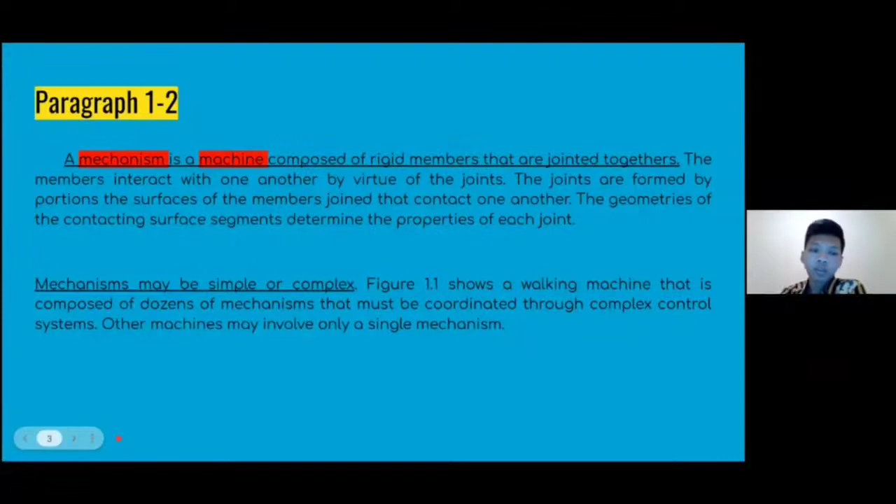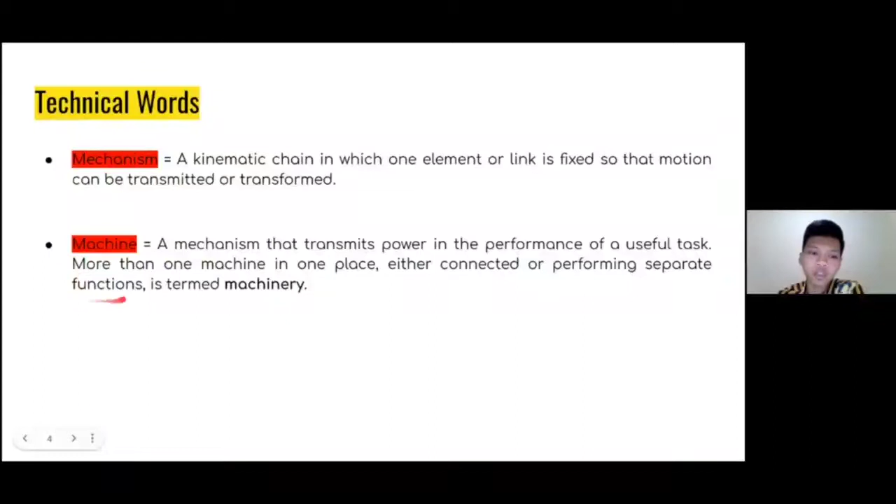Untuk paragraf 1 sampai 2, saya menemukan dua kata teknis yang saya tandai dengan warna merah, mekanisme dan machine. Mekanisme adalah chain in which one element or link is fixed so that motion can be transmitted or transformed. And for machine, a mechanism that transmits power in the performance of a useful task. More than one machine in one place, either connected or performing separate function, is termed machinery.

Selanjutnya untuk paragraf 3, sophisticated as the synonym of advanced, that means canggih. Lalu civil engineering is a professional engineering discipline that deals with the design, construction, and maintenance of the physical and naturally built environment. And the third, military engineering, we can call that combat engineer or ZENI, is defined as the art, science, and practice of design, building military works, and maintaining lines of military transport and military communication.

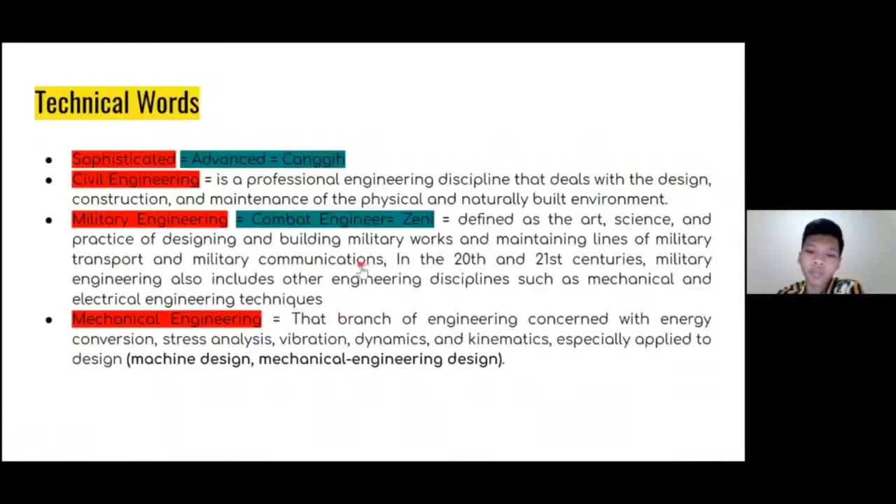In the 20th century, military engineering also include other engineering disciplines such as mechanical and electrical engineering techniques. And last, mechanical engineering is the branch of engineering concerned with energy conversion, stress analysis, vibration, dynamics, and kinematics, especially applied to design, machine design, or mechanical engineering design.

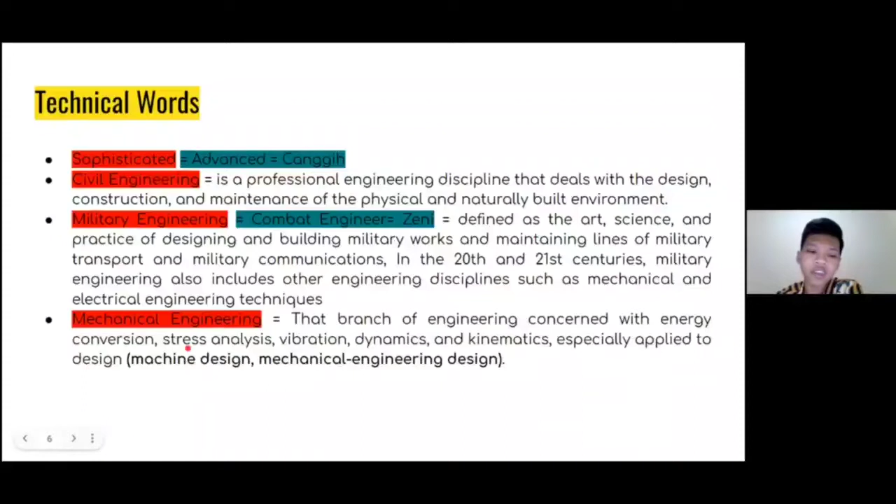And the paragraph 4, I found technical words. Static means lacking in movement, action, or change, especially in undesirable or uninteresting way. The second, actuators is a component of a machine that is responsible for moving and controlling a mechanism or system, for example by opening a valve.

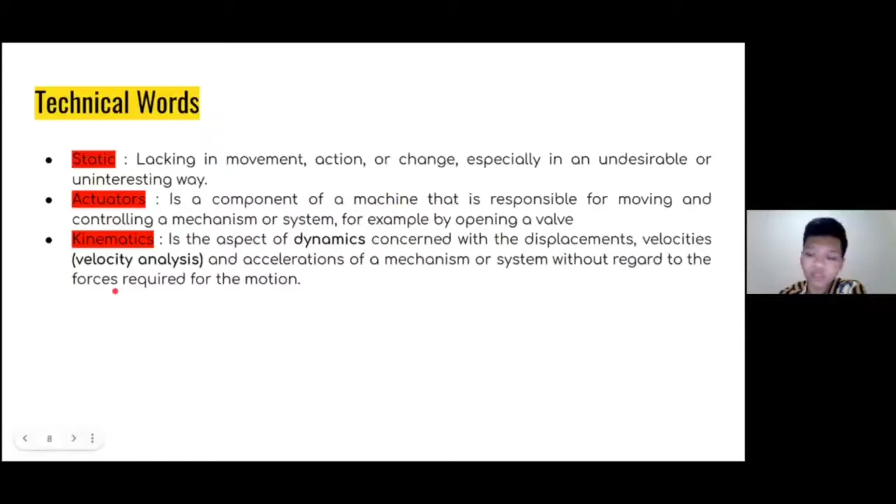Paragraf 6. Di paragraf 6 ini main clause-nya ada di kalimat pertama yang menjelaskan tentang pelajaran kinematika adalah studi tentang geometri gerak. Yang selanjutnya, kalimat-kalimat selanjutnya itu menjelaskan penjelas dari kalimat pertama.

Paragraf 7 juga sama, yaitu main clause-nya ada di kalimat pertama, yaitu tentang materi yang ada di dalam buku yang terbagi dalam 2 klasifikasi. Terus kalimat berikutnya menjelaskan tentang teknik, yaitu menentukan posisi, kecepatan, dan percepatan titik.

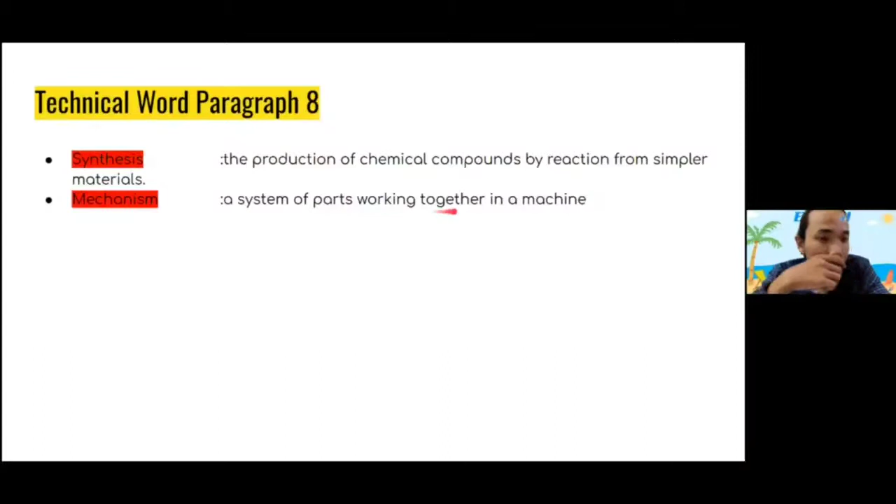Lanjut pada technical word paragraf 10. Mechanism. Mechanism is a system of parts working together in a machine. Kinematics. Kinematics is the aspect of dynamics concerned with the displacement, velocity analysis, and acceleration of a mechanism or system, without regard to the forces required for the motion.

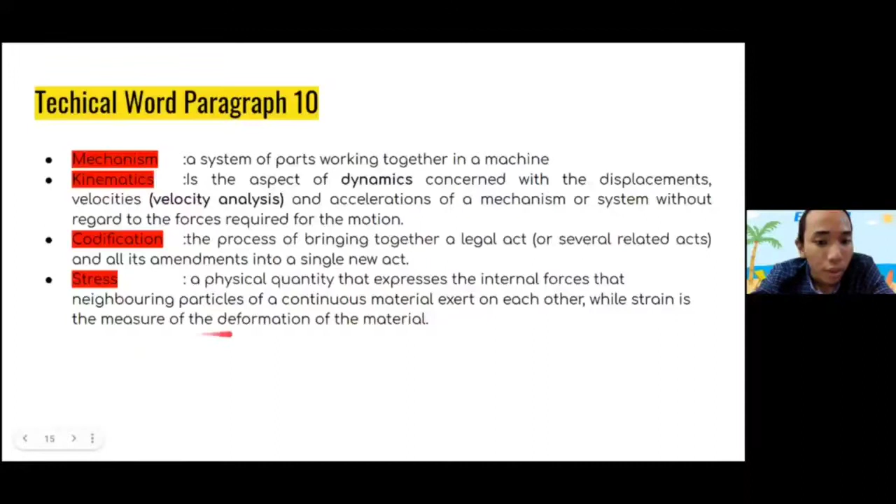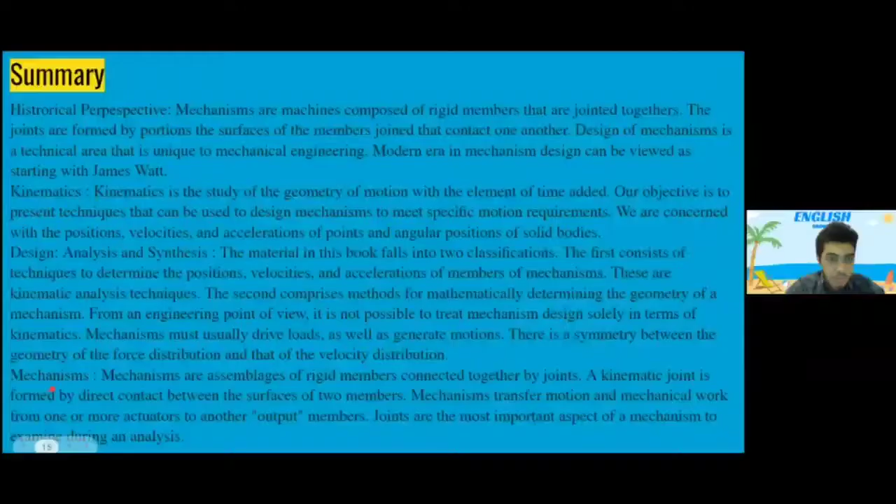Yang pertama historical perspective. Historical perspective ini memiliki summary: mechanism are machines composed of rigid members that are jointed together. The joints are formed by portions of the surface of the members joined that contact one another. Design of mechanism is a technical area that is unique to mechanical engineering. Modern era in mechanism design can be viewed as starting with James Watt.

Yang kedua, kinematics. Kinematics ini memiliki summary: kinematics is the study of the geometry of motion with the element of time added. Our objective is to present techniques that can be used to design mechanism to meet specific motion requirements. We are concerned with the position, velocities, and acceleration of points, and angular position of solid bodies.

Yang ketiga ada design analysis and synthesis. Design analysis and synthesis ini memiliki summary. The material in this book falls into 2 classifications. The first consists of techniques to determine the position, velocities, and acceleration of members of mechanism. These are kinematic analysis techniques. The second comprises methods for mathematically determining the geometry of a mechanism.

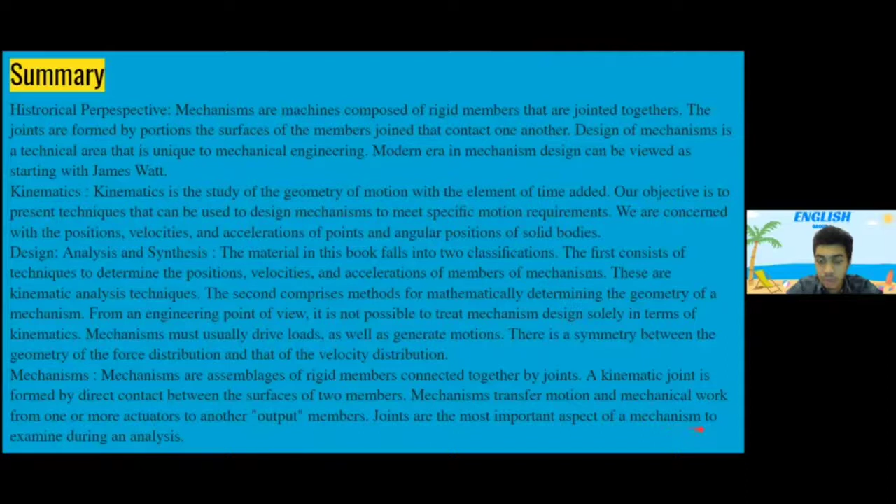Yang keempat, mechanism. Mechanism memiliki summary: mechanism are assemblages of rigid members connected together by joints. A kinematic joint is formed by direct contact between the surfaces of two members. Mechanism transfer motion and mechanical work from one or more actuators to other output members. Joints are the most important aspect of a mechanism to examine during an analysis.